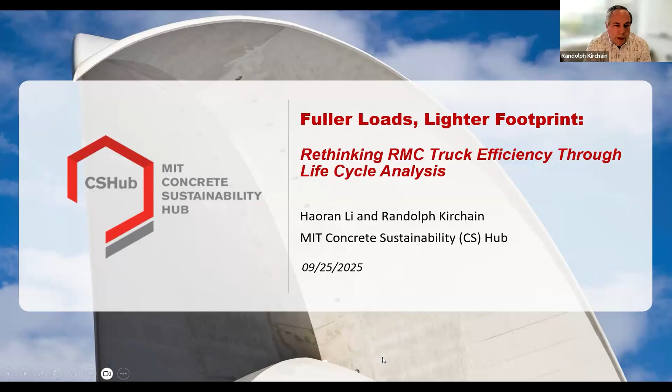So, Haoran, if you could go to the next slide. Just to give everyone a little background on the underlying challenge we wanted to look at here: under the current federal weight limits, which come in at around 54,000 pounds for a Class 8 truck, this in a number of contexts can lead to underutilizing capacity on those trucks, and in theory could even limit them by almost a third of what they're capable of delivering. That leads to higher costs, more fuel use, but also creates other challenges which I think often get overlooked.

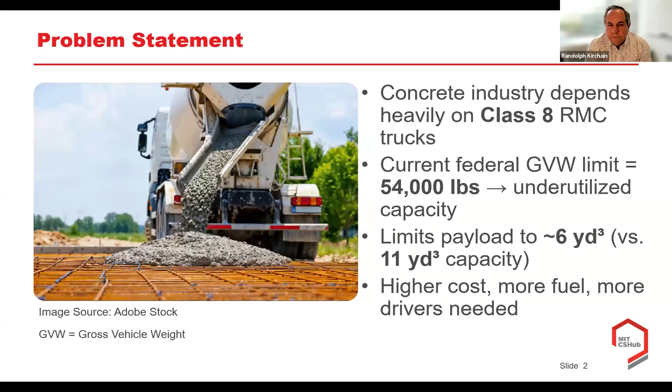If you could go to the next slide for us, Haoran. Ultimately, if we were able to make better use of that truck, we would anticipate being able to make fewer trips. Of course, not in every job, but in many jobs, and that could lead to lower overall costs and possibly lower greenhouse gas emissions. We'll share with you the results of looking at that specifically.

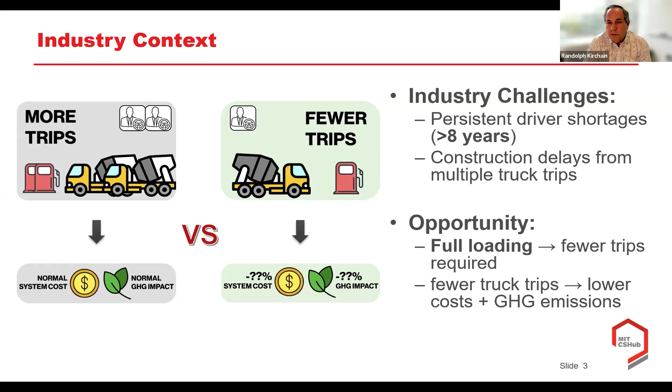But it also, we think, could have some real benefit for addressing a really persistent challenge the industry has faced, which is a driver shortage. It's something that almost every ready-mix producer in the industry reports about. So if we can make better use of those trucks, we're also making better use of those drivers.

So our question was essentially, what's the opportunity that comes from this? Specifically, we asked: if we were able to shift from this limited load context to a more full load context, what would be the actual implications on operational efficiency and fuel use for those vehicles? But then we've looked beyond that, not just at the ready-mix producer implications themselves, but how they impact the transportation system as a whole—how that impacts the pavements these would drive on, and therefore the costs that would be incurred by the agencies charged with maintaining those.

And when we talk about system cost, what we mean is, if our trucks are actually impacting the roads, then they would also be impacting the other vehicles that drive on those roads. So we've developed a fairly unique set of models to let us answer those kinds of questions. And with that, I'm going to turn it over to the real expert here to tell you about how we looked at the question and what it is that we found. So Haoran, if you want to take it away.

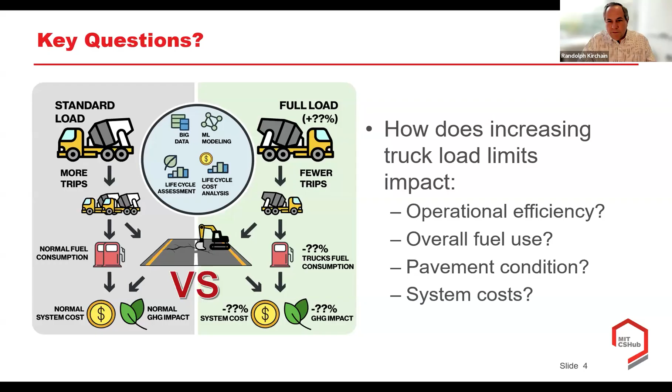Thank you, Randy. My name is Haoran Li. I'm working as a postdoc at the Hub. I'll start from the methodology within this very important project.

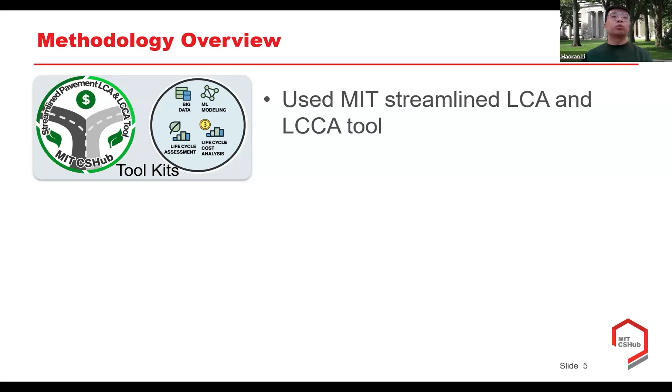First, as many of you already know, we have our CSHub pavement LCA and LCCA tool, which enable us to analyze a life cycle and whole life cycle pavement environmental impact, as well as the cost or economic impact. We also leverage machine learning or AI-based pavement performance tools and modeling to predict long-term pavement deterioration, including cracking, rutting, and long-term IRI performance. Based on that, we're able to consider the whole pavement life cycle.

In addition, as Randy explained, we also include the trucks as the users of the pavement. We're not only talking about the RMC trucks, which we're focusing on, but also interested in the other truck users—what is the impact of pavement deterioration to the RMC trucks as well as the other trucks? Based on that, we were able to consider the fuel use, pavement deterioration, long-term maintenance, and life cycle GHG and life cycle environmental impacts.

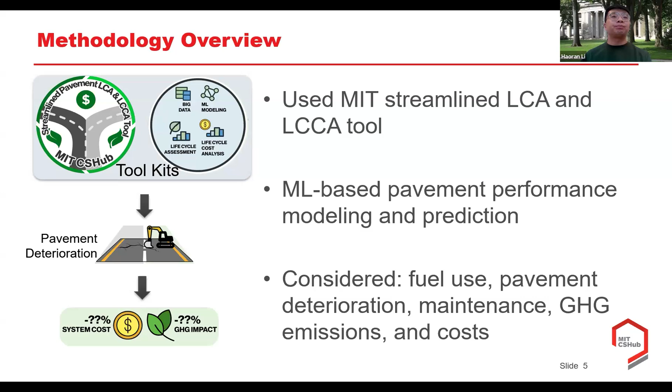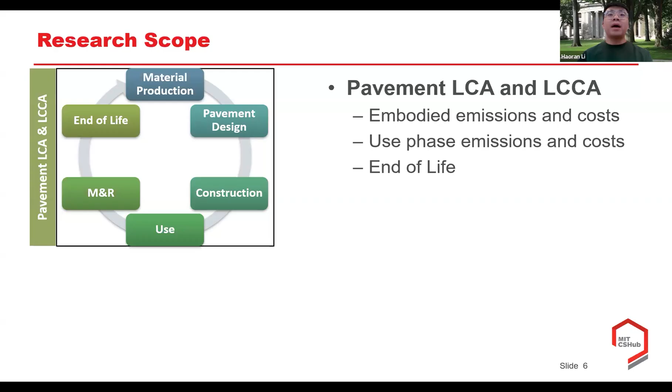We're also significantly considering the use phase emissions and use phase cost, including the pavement-vehicle interactions, or PVI, related emissions, the pavement surface albedo impact, and long-term concrete material carbonation. So as we talked, we include the users of the road—the trucks—fuel LCA and LCCA.

So we also include the normal truck operations, because potentially with more loading by the RMC trucks, there will be fewer truck trips. So we include the normal operational truck fuel use and the related GHG emissions and the cost. So overall, the societal impact or the whole system impact is the user pavement, or the truck pavement

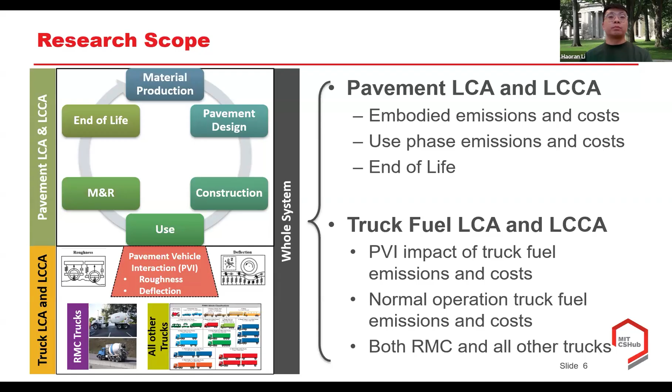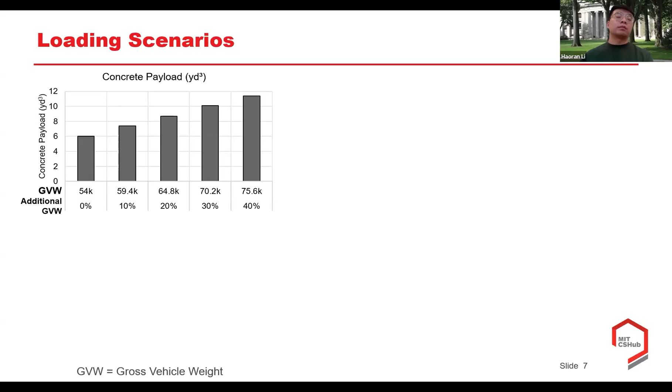infrastructure system. Okay, so to define a few loading scenarios, we will always start from the 0% additional gross vehicle weight, GVW, which is the current federal limit, 54,000 pounds, and we consider up to 40% additional GVW, which is a total gross weight of about 75,000 pounds for the RMC trucks. So the standard load here at 54,000, we have about 6 cubic yards of payload of concrete material. And we'll assume there's 0% change in GVW.

Up to 75,000 pounds, we'll have the fully loading scenario, which compared to the 54 is about 40% more gross vehicle weight. And for this scenario, our concrete payload was increased from 6 cubic yards to 11 cubic yards. So we also consider the percentage of trip savings, because we're increasing the loading and the payload for the concrete materials.

So as we assume, initially at 54 we have 0 changes, and the RMC trucks are traveling 100%, nothing changed. But when we're having up to 40% additional gross vehicle weight, we're having about a 50% reduction in the trips for the RMC trucks traveling over the pavement.

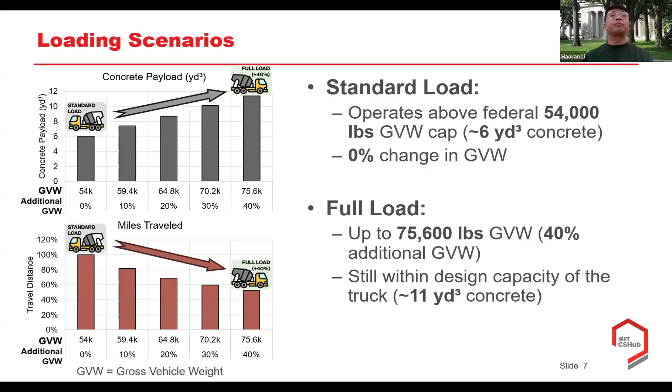Okay, so then we are doing the case study for a Pennsylvania rural interstate highway. So there are a few truck volume and traffic inputs. It's 37K two-way AADT, about 0.8% growth rate, and 30% truck percentage. And within those trucks, there are about 10% RMC trucks, we assume, in this case study. 4-lane pavement, and the analysis period for the life cycle is set as 50 years.

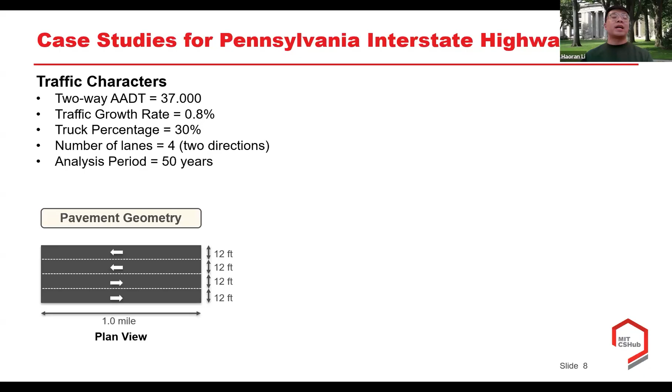So now we have our case study as a concrete pavement, which is the 10-inch jointed plain concrete pavement at the top. Underneath is the 4-inch cement treated base, underneath that the 6-inch subbase, and the subgrade.

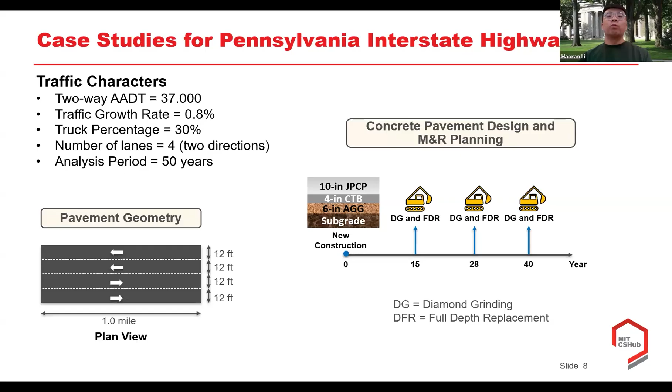So for this Pennsylvania case study, we have a default of 3 M&R during the life cycle, at years 15, 28, and 40, which are the diamond grinding plus full depth replacement for the concrete slab. So within this case study, we performed the pavement LCA and LCCA, as well as the truck fuel LCA and LCCA analysis.

So the first we observe is the truck fuel. So the top left figure is the format we will continue to use to represent our results. The x-axis is the additional GVW, or additional loading, for the RMC trucks. So with 0, there's nothing changed, it's 54,000 pounds for the RMC trucks, up to 40% additional gross vehicle weight.

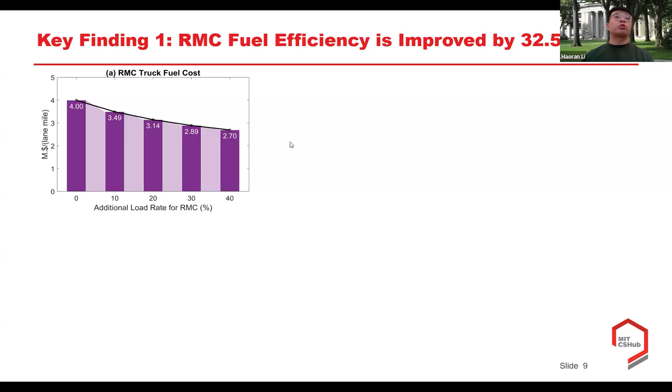So we can see that the y-axis unit is $1 million per lane mile. So this is defined as all the RMC trucks operating or driving on this 1 lane mile of pavement, because we normalized it by the pavement unit. So we use $1 million per lane mile to represent the RMC truck fuel usage, and it's a relative cost. So as we see, when there's no overloading, at 54, the federal limit, we need about $4 million per lane mile for RMC trucks traveling.

But when we have the full loading scenario, up to 40% additional gross vehicle weight, we can save about 32.5% of the fuel used by RMC trucks, because of the trip savings from delivering more per trip, because of the increased loading from 6 cubic yards of concrete material up to 11 cubic yards with 40% additional GVW.

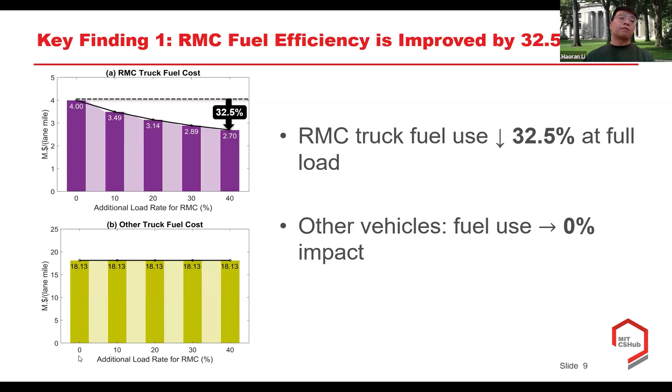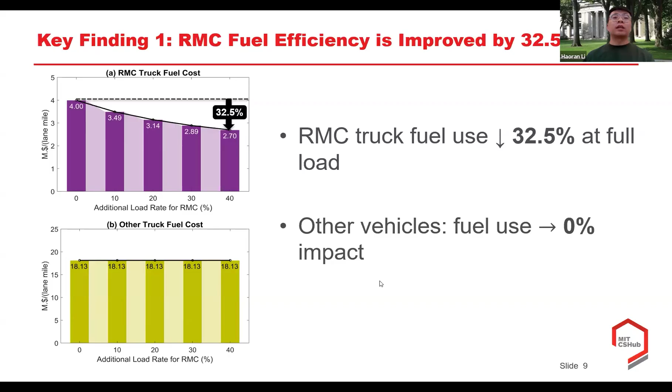And we'll also consider the other trucks' fuel use. As we can see, even though the RMC trucks start from $4 million per lane mile, other trucks still dominate because they're 90% of the total trucks. But we can also observe that from the federal limit, no change, up to a 40% increase of the GVW, there's no change in the other trucks' fuel use relative cost. Because even though the RMC trucks have a little more increase in GVW, there's no measurable impact on the other trucks' fuel use and relative cost, which is 0% impact.

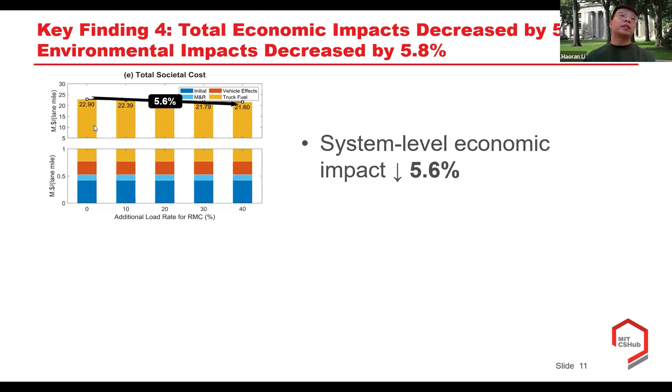But when we keep increasing our RMC trucks' GVW up to 40%, which is full loading, we can see the total societal cost decreased from $22.9 million per lane mile to 21.6. So overall, there's about 5.6% reduction in the system level economic impact, or the total societal economic impact.

And also we consider the GHG emissions from our LCA analysis for both the pavement system and the truck fuels for both the RMC and the other trucks. So you can see that initially, with no change of our federal limits, there's about 78.8 kilotons of CO2 equivalent per lane mile.

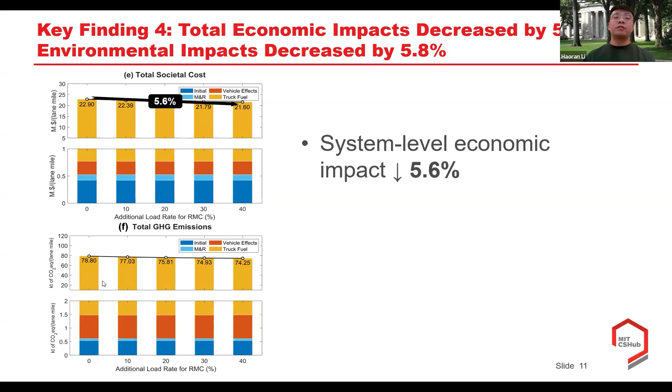But when we keep increasing the additional GVW for RMC trucks, we keep decreasing our life cycle GHG for the total system. So up to 40%, when there's full loading of the RMC trucks, we are decreasing our life cycle GHG emissions for the whole system from 78.8 to 74.25 kilotons of CO2 equivalent per lane mile. That is equivalent to about 5.8% system level GHG emission reduction, or total societal GHG emission reduction.

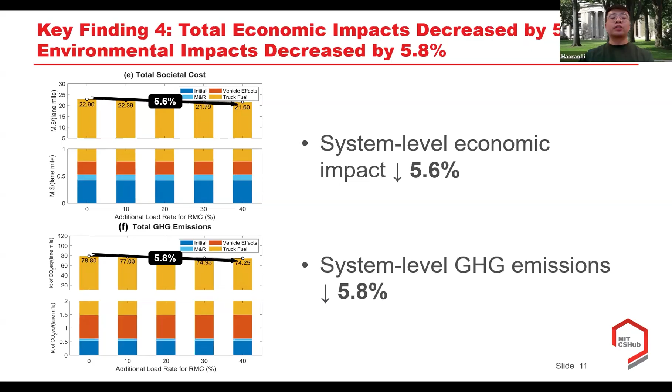Okay, so what is the implication for policymakers and stakeholders? For this research, we heavily rely on data-driven, weight regulations, which perform significantly better than just limiting our RMC trucks using static thresholds. So we're safely fully loading our RMC trucks, which means the 11 cubic yards of concrete material is still within the drum capacity and still within the Class 8 three-axle RMC trucks' manufacturer design capacity.

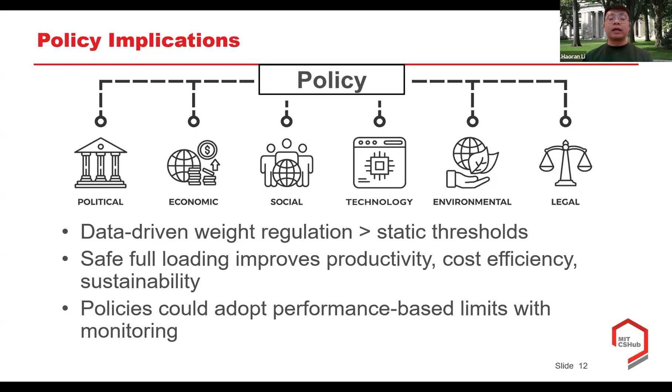So when safely fully loading our RMC trucks, we can improve productivity and cost efficiency, not only from the fuel, but also the overall societal system level cost, as well as the whole sustainability of the pavement-truck system and the whole societal benefit. So policies could adopt better performance-based limitations with life cycle monitoring of the pavement and truck system.

Okay, so the takeaways from today's webinar: for now, with the 54,000 pounds standardized Class 8 three-axle RMC trucks, we may need more trips, and we have normal fuel consumption if we do not change anything. It has normal pavement deterioration, normal costs, and normal GHG emissions.

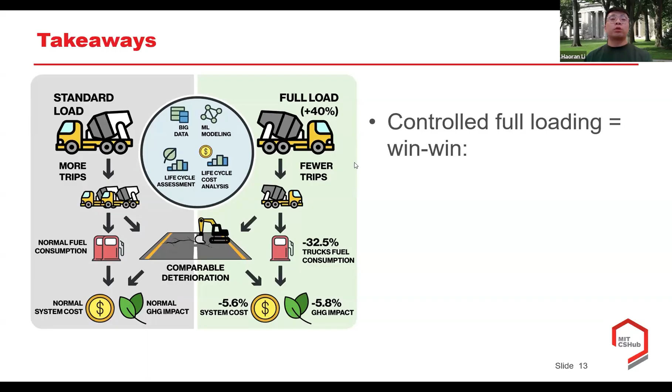But when we safely control our full loading scenarios for RMC trucks, as we see on the right-hand side of the figure, it is a win-win. So first, we're saving fuel use and the fuel-related cost and fuel GHG emissions, about 32.5% reduction of fuel use when we have full loading of RMC trucks.

And for pavement deterioration, it results in comparable long-term pavement performance, which emphasizes that our current pavement design and current maintenance and rehabilitation schedule are still adequate for RMC truck full loading scenarios. And for the overall pavement infrastructure system, we're lowering the societal cost by up to 5.6% and GHG emissions by up to 5.8%.

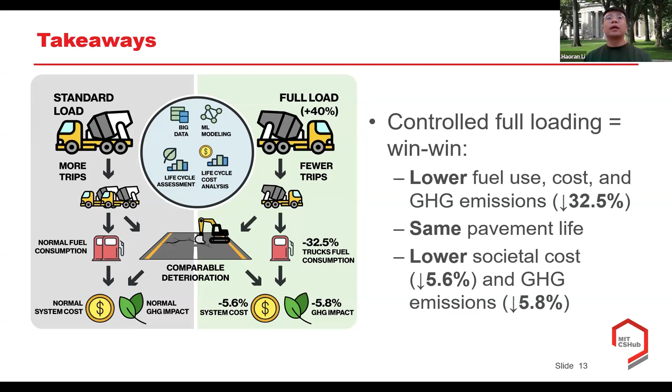Thanks so much, Haoran. And I think we have at least one question coming in, but I might kick it off a little bit by asking you a couple things about comparing what you've done to previous work, and then maybe think a little bit about what are some of the extensions or limitations. Actually, no, let's go ahead. We could probably address this question that had come in.

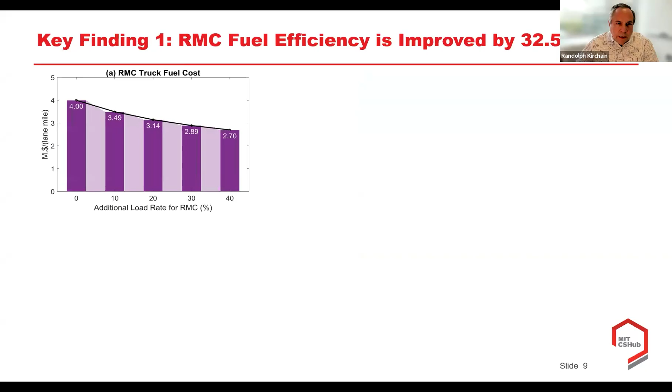So in other words, what we're seeing, and maybe this is a good jumping off point to a question I was going to have, which is what's different about the analysis that you've done and other analyses that we see out in the scientific literature. But before getting to that, correct me if I'm wrong, your analysis would suggest that with this change allowing the trucks to run fully loaded, our models would suggest no change in the rate of deterioration for those pavements.

So that probably sounds a little surprising, right? We have some trucks carrying more weight, but I think it comes back to one of the key differences in the way that you structured this analysis than what we've seen from others. So maybe you could first make sure that I answered correctly there, and then secondly comment a little bit on that. Right. Yeah. So, Randy, your brief answer is correct.

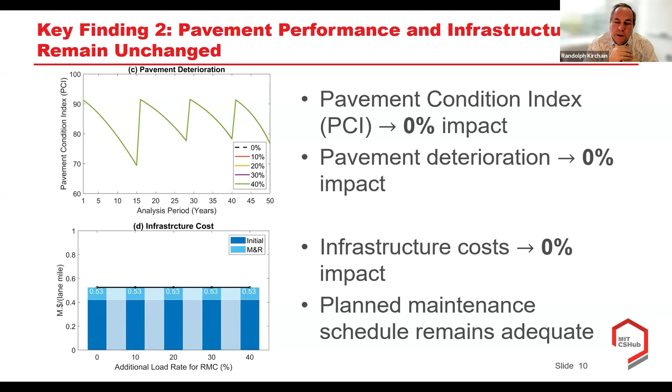So you mentioned the fuel data. I think that would be another thing we might put out a call for help on, which is that, to be honest with you, the fuel use information that's available in the literature is somewhat dated, and so it would be great to get more up to date information about the actual fuel efficiency.

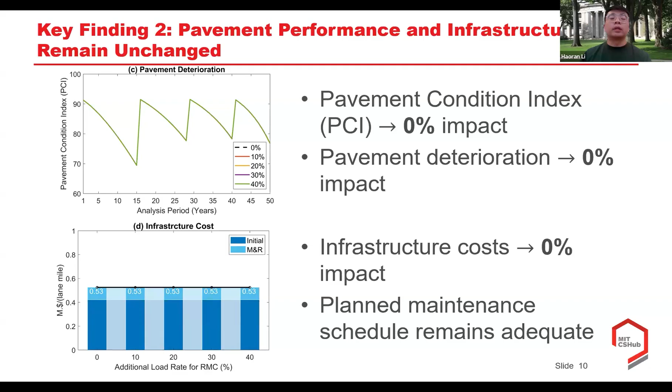Oh, that does remind me of one small point I did want to make. On your key finding one, you had mentioned that the fuel efficiency improved by something like 30, 32%. I did want to clarify for folks that we're using the term fuel efficiency here a little bit differently than is probably most common. Haoran, correct me if I'm wrong, but I think what you mean here is essentially the amount of fuel per cubic yard delivered, as opposed to the more typical measure, miles per gallon, or essentially gallons per mile, right?

So we are actually assuming that fuel efficiency kind of goes down as the load goes up, right? In other words, I'm using more fuel per mile because I'm carrying more, but I make it up because I'm carrying more. So I did want to make that one small clarifying point there.

But it looks like we don't have any other questions coming in. So I want to thank everyone again. I think that Haoran's work here is about a very specific topic, but points to some real opportunities for meaningful policy change that could have economic benefit, both to ready mix producers and to the economics of the system as a whole, as well as greenhouse gas benefits. And so, thanks so much.